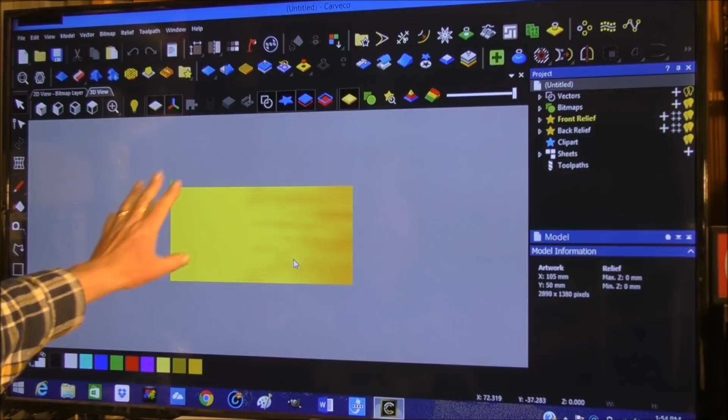I normally leave this resolution slider bar in the middle. It's fine, and obviously we're dealing in millimeters, so we're going to OK that, which will take us into the program screen. This is the 3D screen at the moment, but we want 2D. So I'm going to start with the outside. Okay, now this little aluminium container was purpose made for a job. So we're going to get the square or rectangle. We're going to just do that.

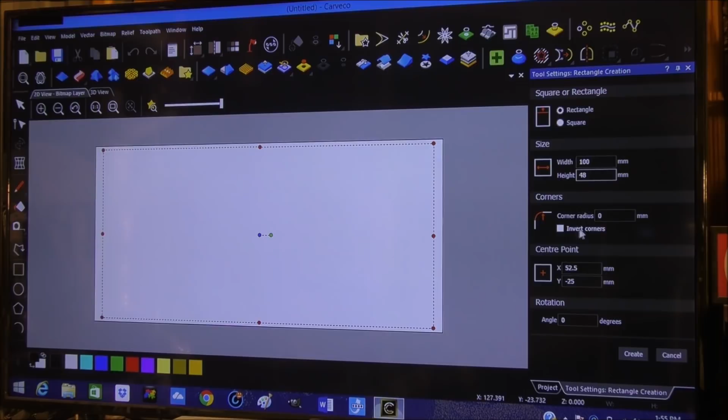Now there's a couple of things we need to do here in this wizard or dialog box. And the first thing is the actual size. Now the actual size of it was 100 millimeters, and it was 48 millimeters. So you can see now that the box, as we're altering here, is jumping to the correct size and position, or close to it. Now I wanted rounded corners, and I wanted a 6 millimeter radius.

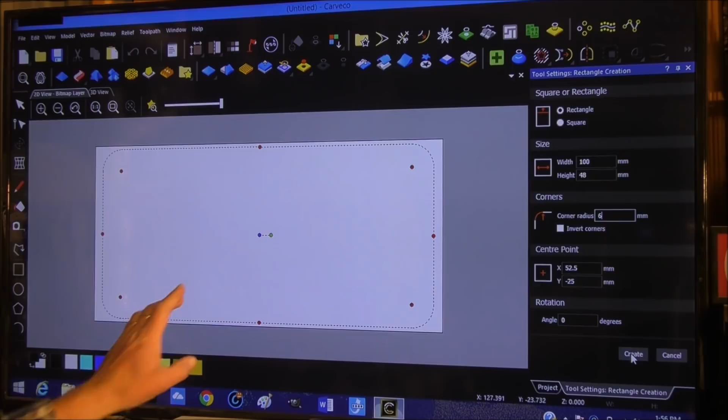So there it is, there's the radius, 6 millimeter. But I want this object to be set right in the center of the stock bar material. Now to do that is fairly easy, and it is actually set right in the middle. So Carveco has determined that yes, I wanted that right in the middle, and it's put it there, and now we can create that. And there it is. So we can get rid of that.

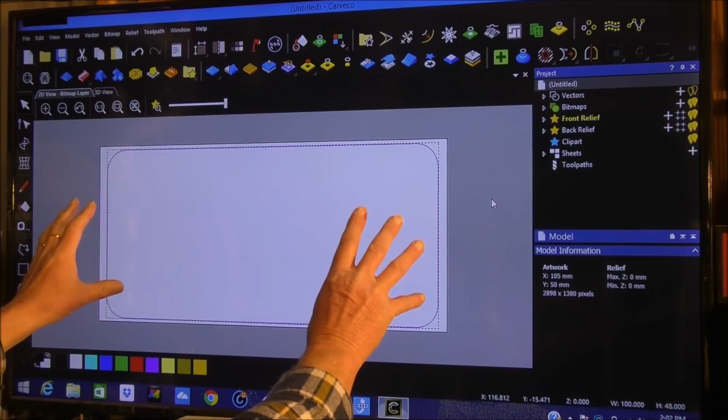Okay, so the next operation we need to do is to copy this vector, and a vector is any line on the screen. Any line, any shape at any angle, it's a vector. So we need to copy this vector inwards 2 millimeters, and there is a tool to do exactly that. That's this one, and it's commonly known as offset vectors. So we'll choose that one.

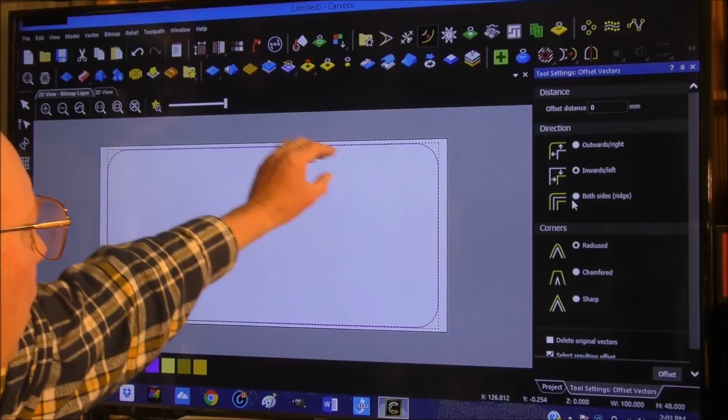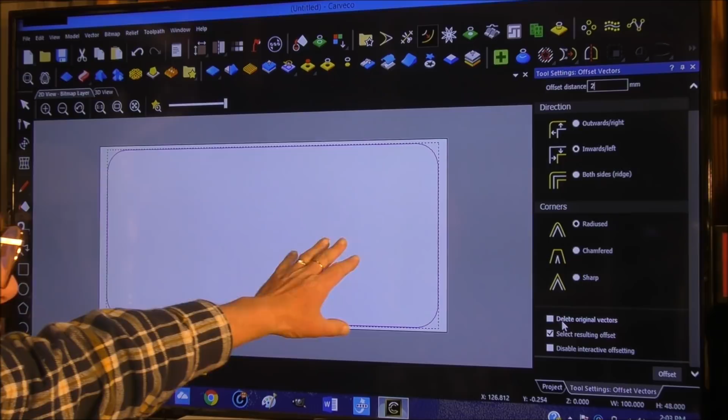We want to copy this inwards, and you can copy either side, outside or inside, a specified amount, and the specified amount is 2 millimeters, because we want a 2 millimeter wall, and radius corners, yes. We have the choice here of deleting the original vector if we wish. Okay, so we can offset, and that's exactly 2 millimeters in, which is just under 1/8 of an inch. So we can get rid of that, and we can click off that.

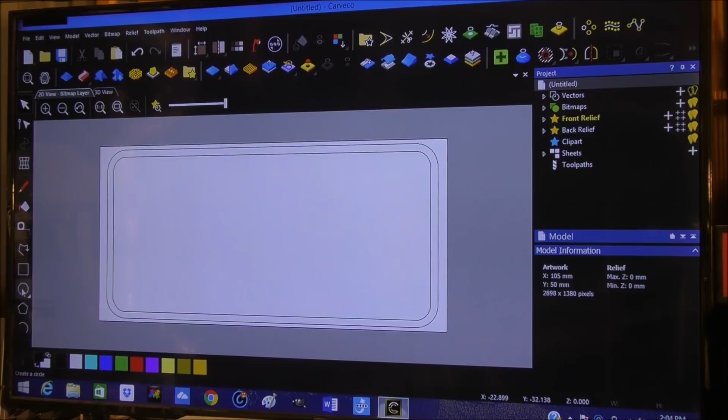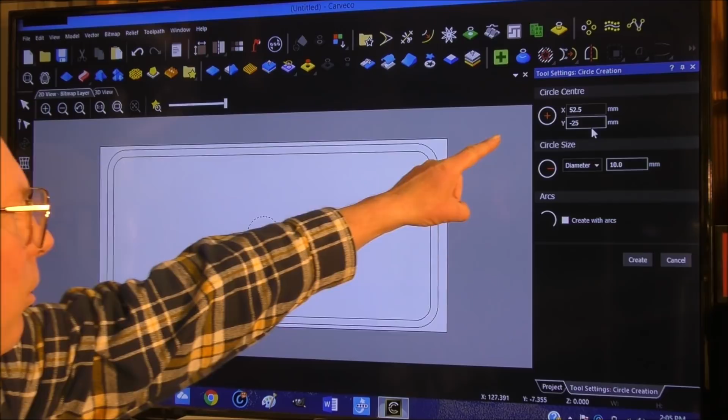Now in the center we want the central boss. If you notice, I have snap turned on, so when we get near the center, the cursor changes, telling me that I'm at the center. I want this to be minus 25, that's correct, 52.5, and it is in the center. Do you remember the bar stock was 105 millimeters long? So that has gone right in the center. It's telling me that it is in the material center. That is exactly where we want it. So we create.

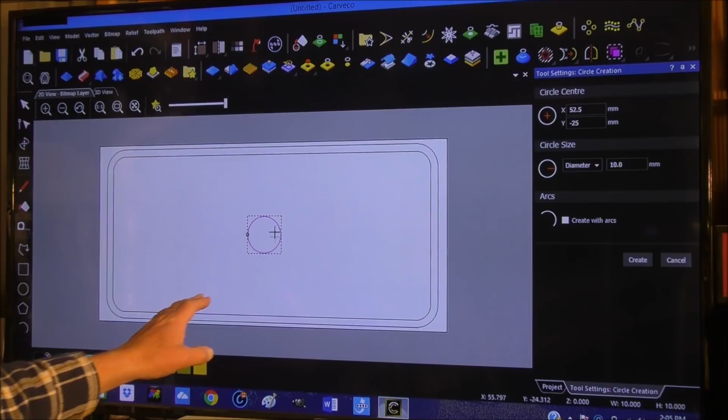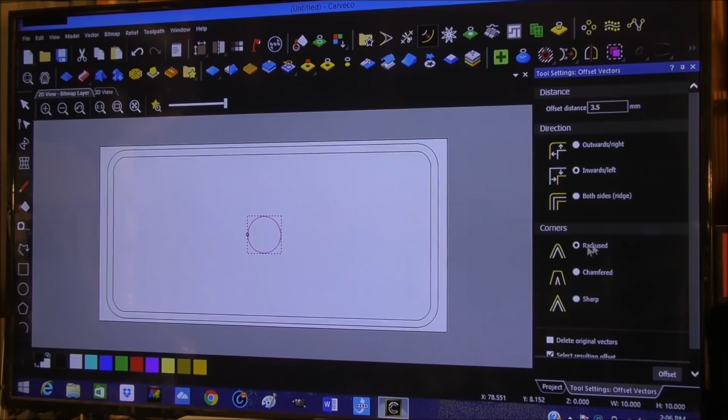And to save ourselves a little bit of time and effort drawing another circle, because we want to drill a hole there, we're going to use this tool again, and we're going to offset inwards. Now we need to offset inwards 3.5 millimeters, 3.5 millimeters inwards, radius. This is all okay, offset. So basically that is our part that we need to machine.

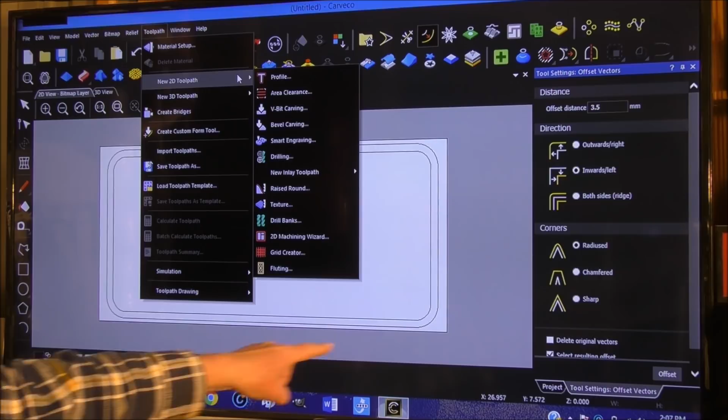So now we will go to the machining operation. This is a straight 2.5D machining operation. So we come up here to tool paths. It's a 2D operation, and the first thing we're going to do is machine the profile around the outside. So we choose profile. So select a vector.

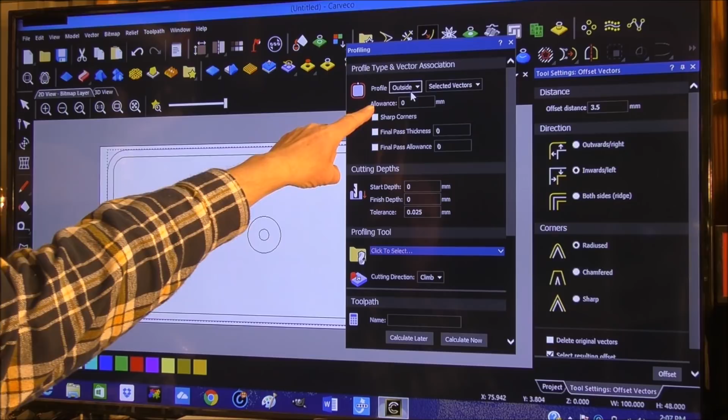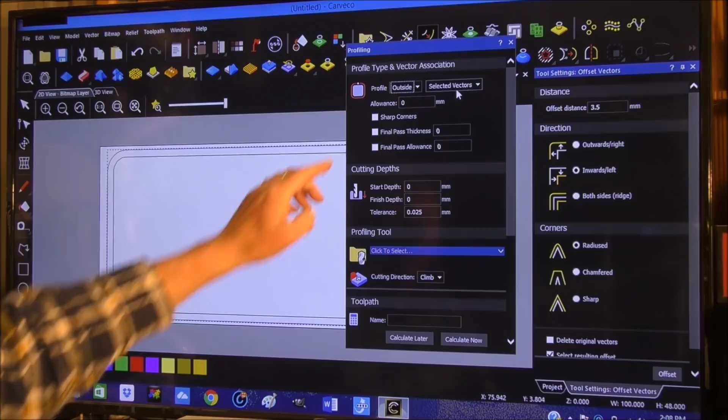Okay, so you're telling the program, and in this case the wizard, this is the part I want you to machine. I want you to machine it on the outside. You can select along if we wish, where the center of the tool will go along it, or inside it, as depicted on the little diagram here. But in our case, we want to profile the outside, and it's the selected vector. We've already selected it, so the program knows exactly what we're talking about. This we can leave alone. It's a radii, so it'll just follow it around.

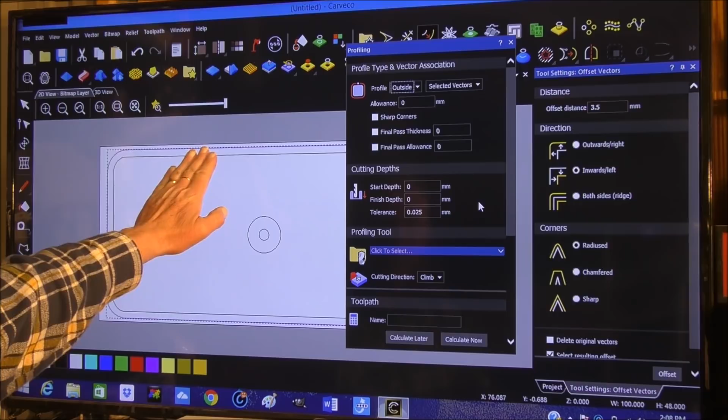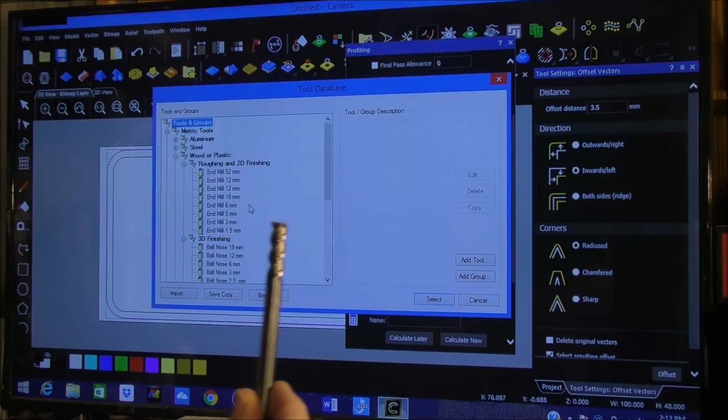Start depth 0. We want to start at the top of the material, and we want to finish 16 millimeters down. Okay, tolerance 0.025 millimeters. That's fine. It's not an absolute precision. The end mill that we're going to use is this one. It's an extended 8 millimeter 3 flute. See the 3 cutting faces there? 3 flute. Beautiful. This is a tungsten end mill, very long lasting.

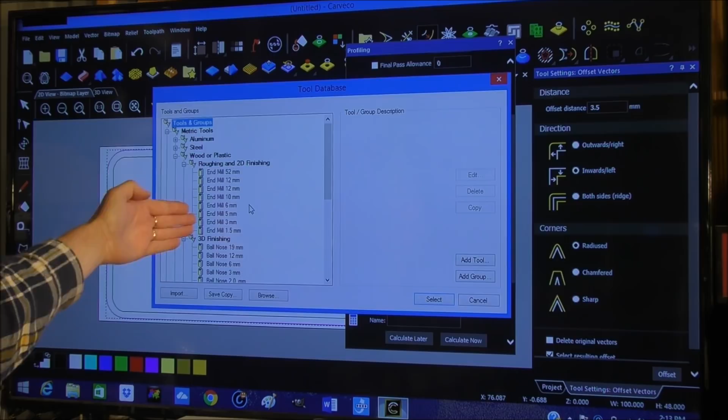And it doesn't exist in our tooling list, so we're going to create a tool in the tooling list. We're going to choose a 6 millimeter, copy it, and choose the one above, which is the copy, and we're going to edit it. This is just representing an end mill. It really doesn't matter about the number. So we're going to put here 8 millimeter. Millimeters per second, that's the feed rate. And diameter 8.

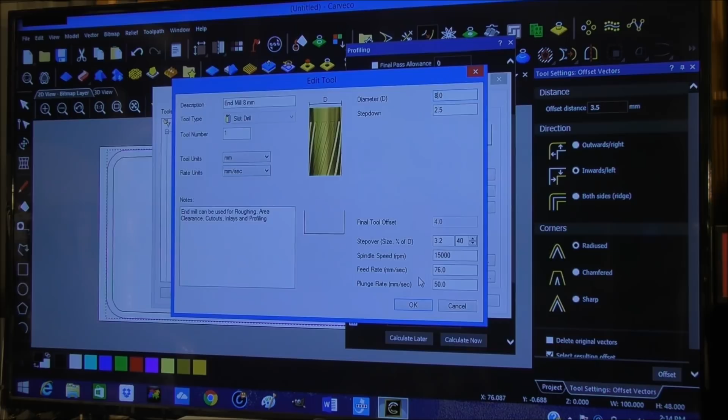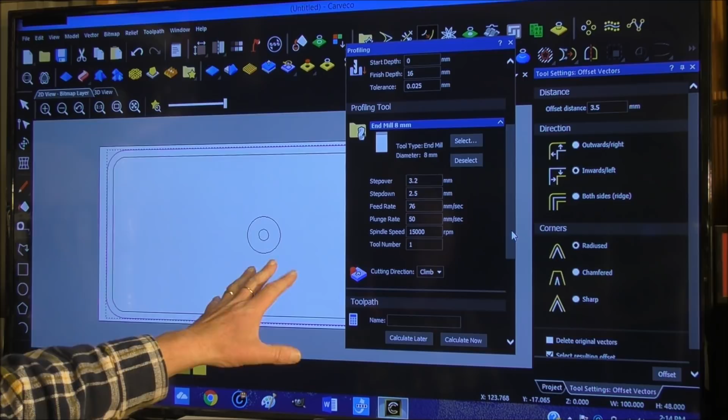This is okay, we can leave that, because all these numbers we can change. Okay, so now we can change the actual speed and feeds. Speed and feeds, here we go. This is where you change or select the speed and feeds for a particular job. Now, you must, in the back of your mind, have an idea: what is the material and what will the tool and the material withstand in cutting.

Step over. Now I've got quite a small, it's a converted SIEG X2 milling machine. It's only a little 350 watt motor, or 375 watt motor. So it's like half horse. So it won't withstand a great deal. I mean, it does the job okay. So we're going to say we want to step over, and the step over is how deep into the material it will go. 3 millimeters, a little bit too much for it, maybe. It possibly could do it.

In actual fact, the maximum step over we require is 2.5 mil. We're going to say 3 millimeters here, because we want to do it in one go, and we're going to ensure that we do it at such a rate that it's capable of handling. 2 millimeters. Now that's step down, so each time it goes round, it's going to step down into the material. 2 millimeters.

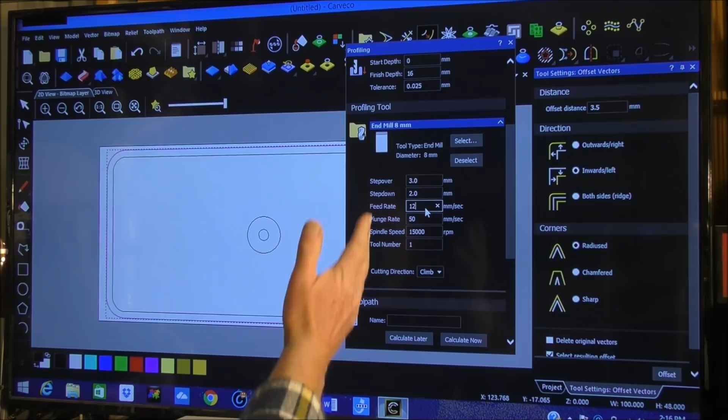76 millimeters per second of feed rate? I don't think so. This is very high. This is set for a commercial CNC router, or even something like a Haas. So we're going to say something in the region of 12 millimeters a second, but bear in mind, whatever I set in here, I can alter it in Mach 3 to 10% of that figure if I wish, which will be very, very quiet. I normally set the plunge rate at half the feed rate, so that's 6.

And don't forget, this is going into aluminium. Now I know that flat out, that little SIEG, and the way I've got it belted, will do 4,000 RPM. I don't have a tool changer, so that's not going to matter to us. Now, climb milling, yes, if you have the option, always climb mill. It just cuts an awful lot better. Add lead in and lead out moves, definitely. Distance and diameter, I'm going to go 10 millimeters.

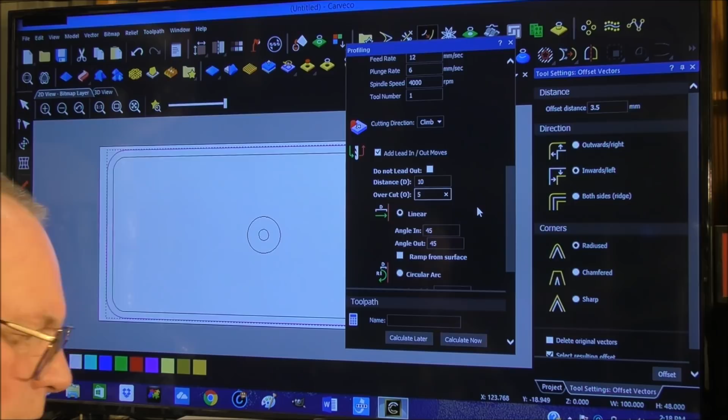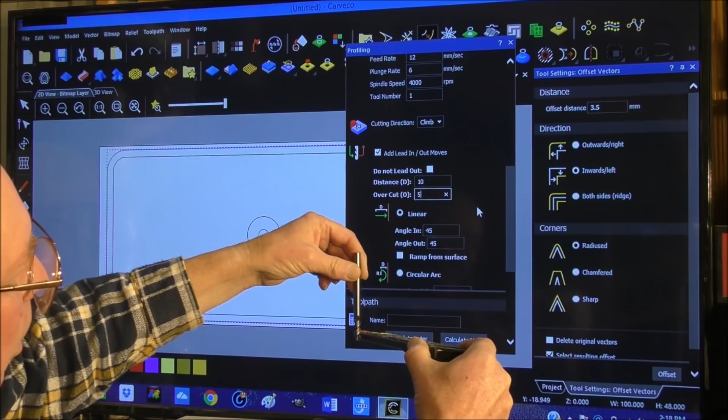Cut. 5 millimeters. So if you've got a piece of material, this will do. What I'm doing with this lead-in move, because I'm going to run around this outside, I want it to come into the side, then start going around, but I want it to come in gently, you see. So that's why I'm setting these figures up. I'm saying, well, come in 10 millimeters, then come in gradually.

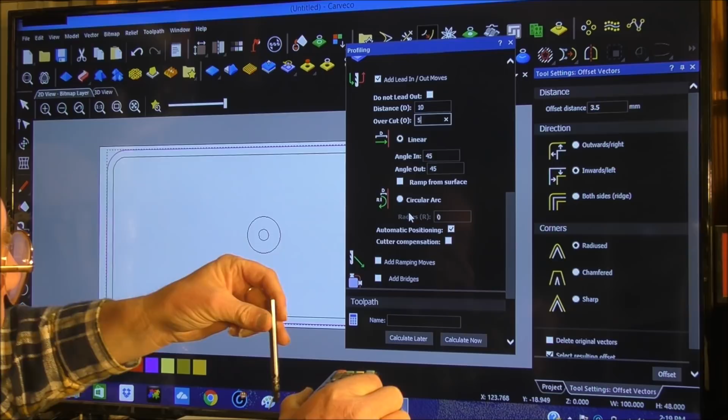Ramp from surface, there's no need to ramp from surface, but this is what I want. I want it to come in at a nice segment, sort of like this, as depicted in here. And yes, radius 5, because I set the distance here 10, so I need a radius 5 to come in. And you see on the video, indeed that's what happens. Ramp moves, I will include ramp moves, zigzag 10.

No, there's no need to. This will sort it, actually, because this will do it right from the very first cut. That'll handle it. No need to do any more there. Cut sequence, no. This is okay. Safe, 20mm safe area above the material, that's fine. Now let's define the material.

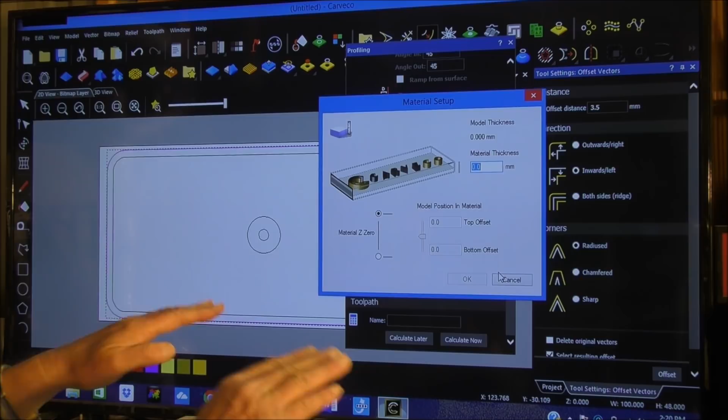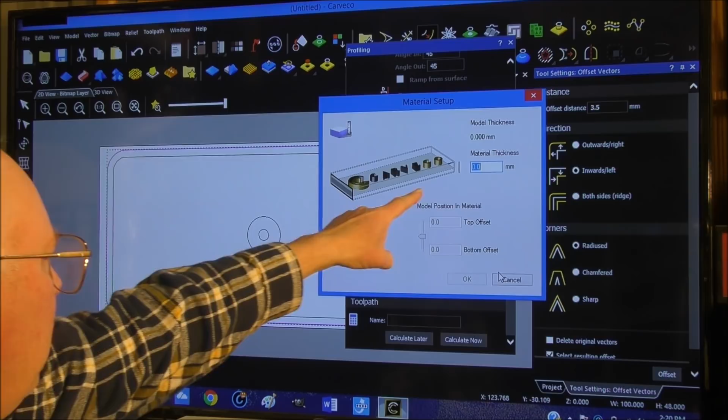Now what you've got to think of is, okay, I have the material clamped in a vise. How much am I going to have sticking out? I know I can safely clamp 3mm, and I know I want to come down 16mm, so that leaves me 2mm clearance between where I'm cutting and the top of the vise. So I'm going to tell this that the material thickness is 18.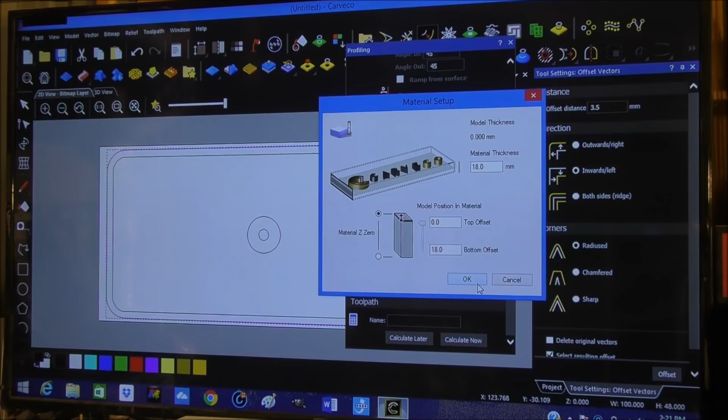And model position is in the top. This is all okay. Yeah, model position top, 0 is in the top. Okay, I'm going to OK that. Okay, so now we label this. Now I abbreviate everything. Cannot calculate for the following reason: lead-in distance must be less than or equal to the radius.

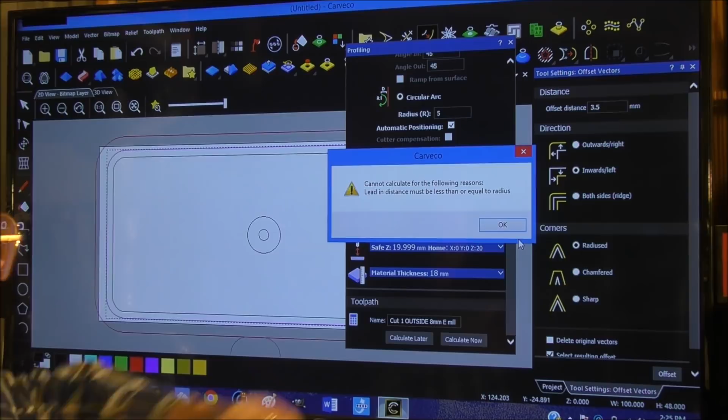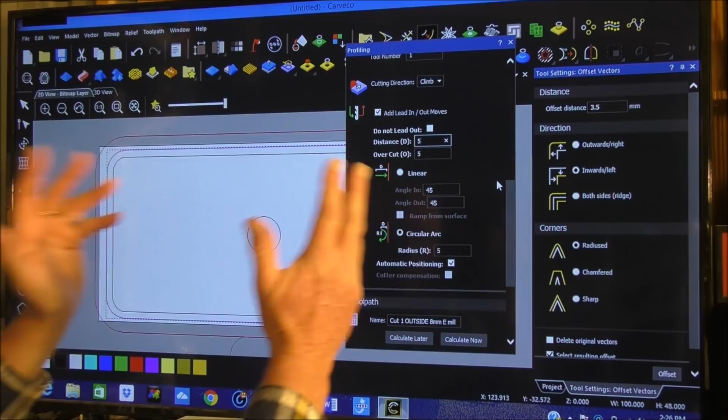See, now I made a mistake here, albeit a deliberate one to show you. The radius here is 5, overcut is 5, distance 10. So actually that is supposed to be 5. Now that's the beauty of this program too. There's that much thought gone into the making of this program, and over the years the modifications to the program, that it won't allow you to make a mistake if possible. So calculate now, and it's done.

So now we can get out of that one, and there is the tool path, with the lead in and lead out moves. It's indicating it's done.

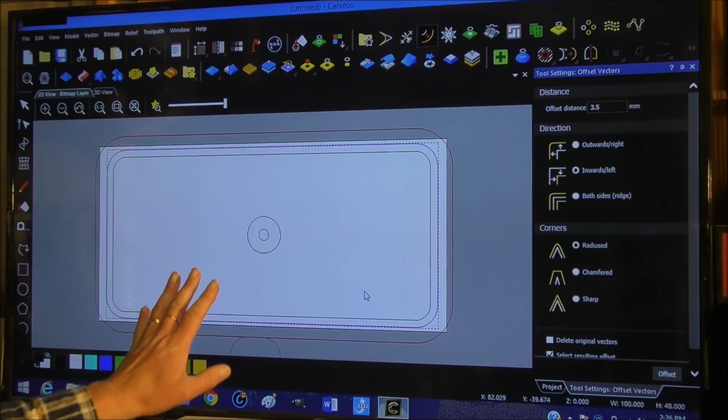So what we're going to do now is an area clearance. We want to machine this area between the inner wall and the outside. So you select that, and notice this vector shows it's selected. Then press shift and select this vector as well.

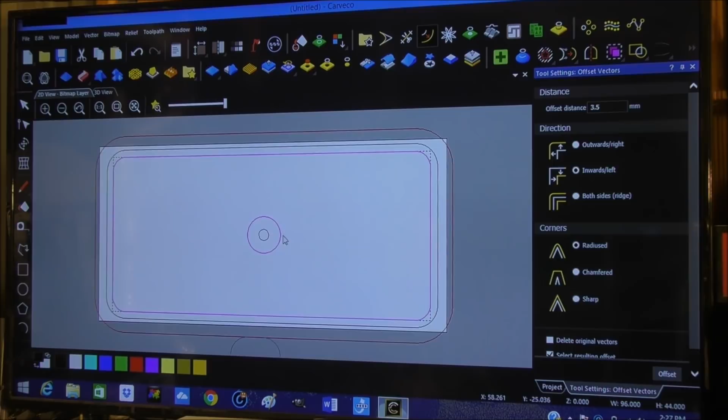So when we select the machining operation, say between the selected vectors. Toolpath, still a two-dimensional operation, it's an area clearance, and selected vectors - that you have a choice. So we've selected the vectors, so it knows you want the inside material machined out.

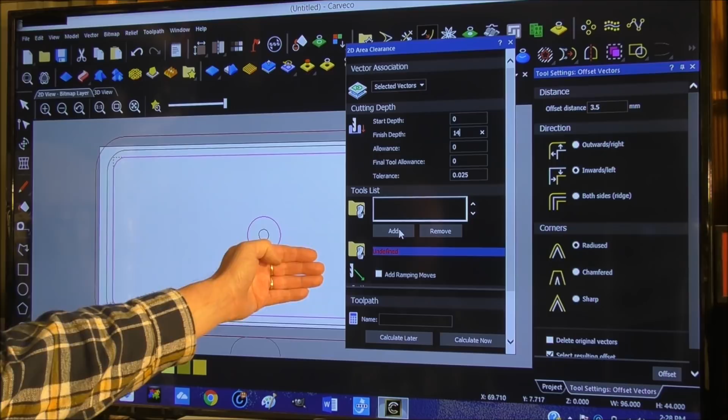Now then, start depth 0, finish depth 14mm. Tool allowance - so now we need to add a tool to machine this. Open, 8mm, there it is. We put it in the tooling list before.

We're going to use the same tool to clear this out. I'll select that. Okay, so we've selected our tool. Now we're going to set the parameters.

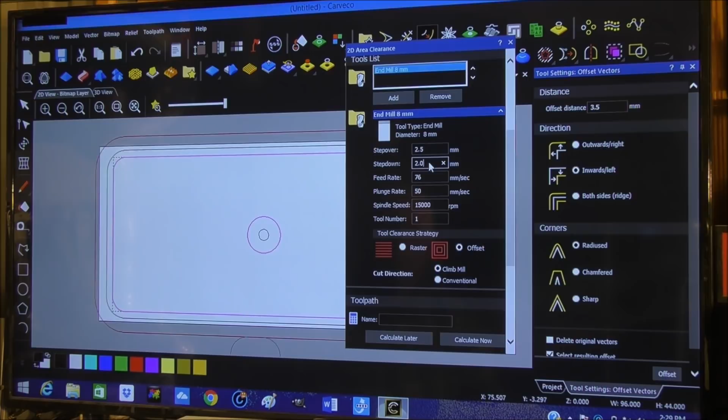Step over - we're going to make this easy life on the tool. We're going to say 2.5 millimeters. Step down of 2. And there again, 12. Not forgetting we can alter this in Mach3, it's not set in concrete. 6.

4,000. Doesn't matter to us about the... and this is set right for us. We want to do an offset, in other words, we want to come in with the tool.

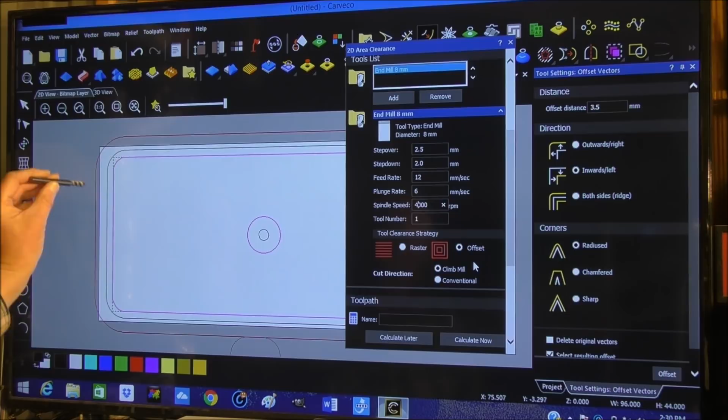It will start in the middle here and machine from the center and work its way out, and then go like that - not come in and go back and forth. That's not the way to do it. In this sort of circumstance, you need an offset. Climb milling, always use climb milling.

Inside start point, start in the middle of the material. Independent finish depth - now let's see if I wanted to do a finish cut. I don't want to do a finish cut. Add ramp moves, definitely. 10 degrees, that's okay. Minimum ramp length, I'm going to 10 millimeters. Zigzag height, 5 millimeters.

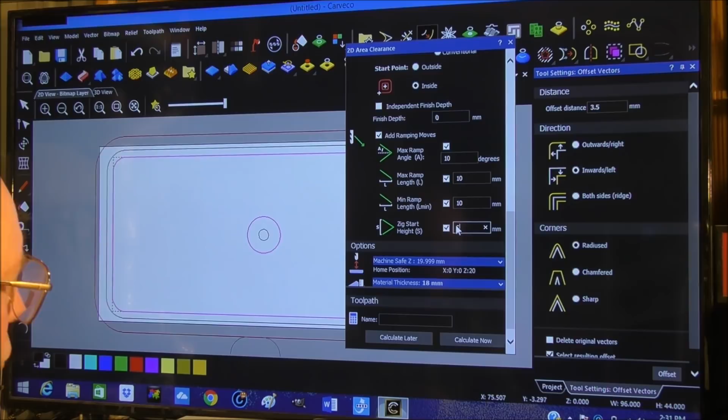So that means it's going to come into the material. It's going to go zig, zag, zig, zag, zig, and go into the material gently, not come in and hit it hard.

This is all set up, this is fine. So this is the second cut. I abbreviate everything, as I've said - cut 2, 8 millimeter, E mill.

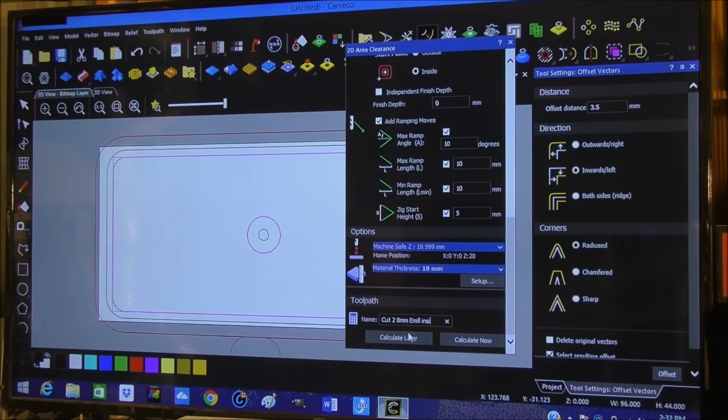Let's say where it is - so this is the inside. Okay, calculate, and there it is. And we can get rid of that one. So we've done the outside, we've done the inside.

Oh, facing operation - actual fact, I forgot about that. So what we need to do is face off the top first, actually. So we can do that now. It's no great drama. Now, for me to machine the top off this, I have to draw an additional vector.

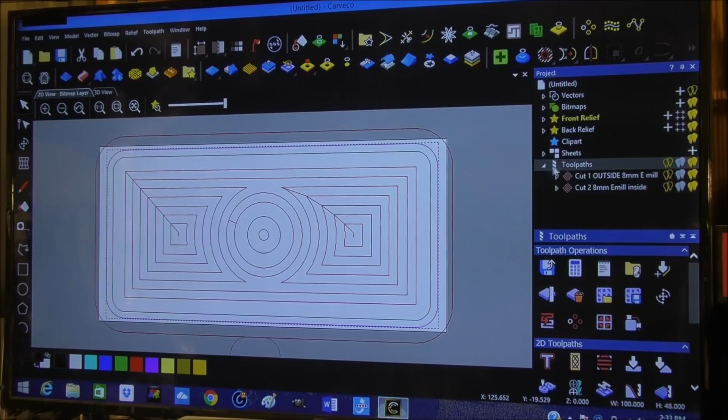Now I'm just going to get rid of some of these lines, let's turn these off. There we go. So what I need to do, so I can face off the whole material, is draw a box. I'm going to use a big 19 millimeter tool. I'm just going to draw a box around the outside there. It doesn't have to be an exact size, as long as it sort of overlaps, so I know I'm going to machine the whole and not miss any.

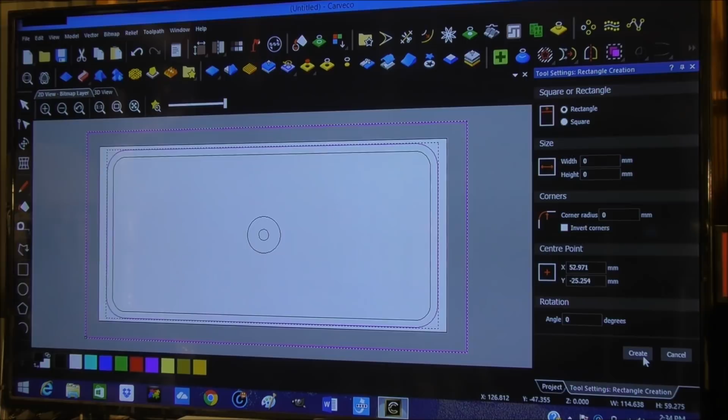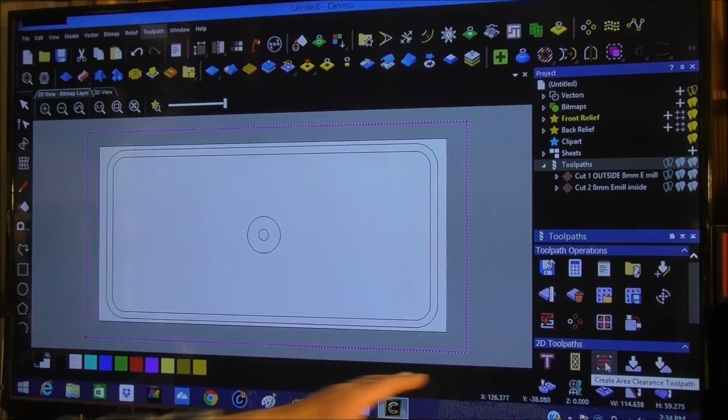So we can get out of that. Okay, I've actually pulled up this now. You can get to the tool paths up here, okay, but you can actually get to them here as well. So select the vector you want to deal with. Area clearance in 2D. So selected vectors, which is that one.

Start depth 0, finish depth - I want to take off 1 millimeter. One millimeter. Tolerance. Okay.

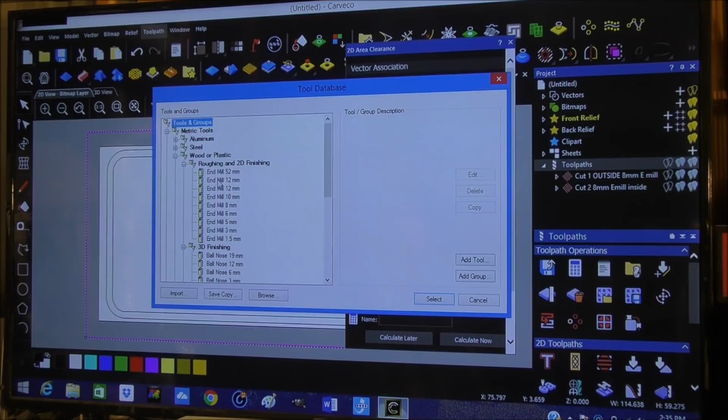I'm going to have to make another tool because it's not in my tooling list. So copy, pick the top one, because it's going to be a larger size. Edit. 19 mil.

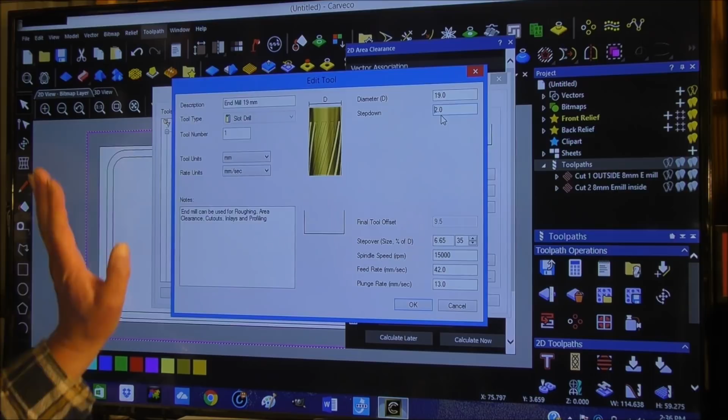Step down - I'm just going to say 2mm. I can alter this on each job. 15,000 - I'm going to leave this as it is because I can alter it on the job. Select.

So here it is, let's have a look. Step over. That's 1mm depth. That's probably okay, I'm going to run with that. Step down - I want to do this in one cut, 1mm.

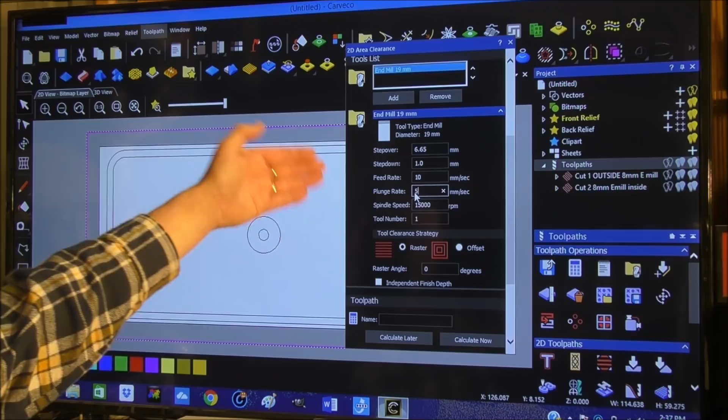Feed rate - I'm going to go 10mm a second. Plunge rate, 5mm, so I go 50% of whatever the feed rate is. I find that works. In this case it's going to be 2000 RPM.

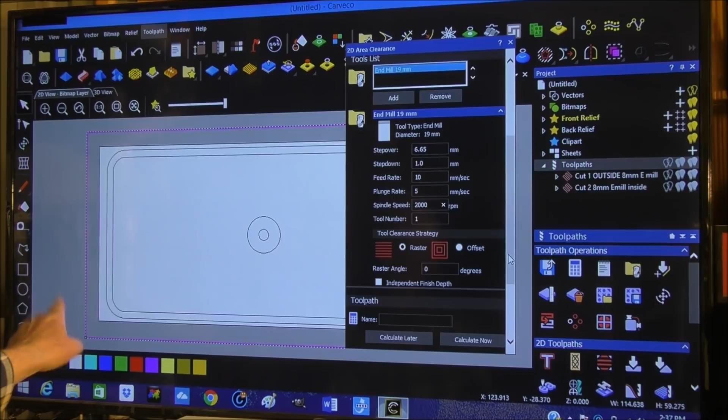Tool number really doesn't matter. In this case I want to do a raster, so that means I'm going to come in here and go back and forth and work my way across the material. 6.5mm each step in.

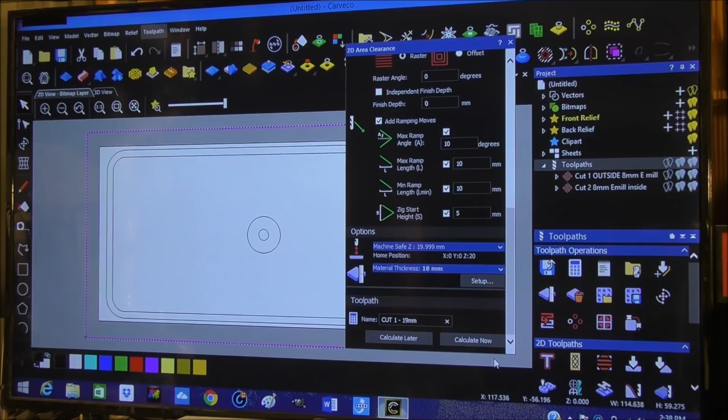Ramp moves, I always use ramp moves. This is okay, this again is okay. I know exactly what that is, so I can leave it at that. And then it is done, and I know I'm going to get all the material in - there's not going to be any left there.

So I can turn these on now. There we go, visibility of all tool paths. So okay, we've got one left now, and that's a drilling strategy, and that's this one in the middle. And okay, so we come up here.

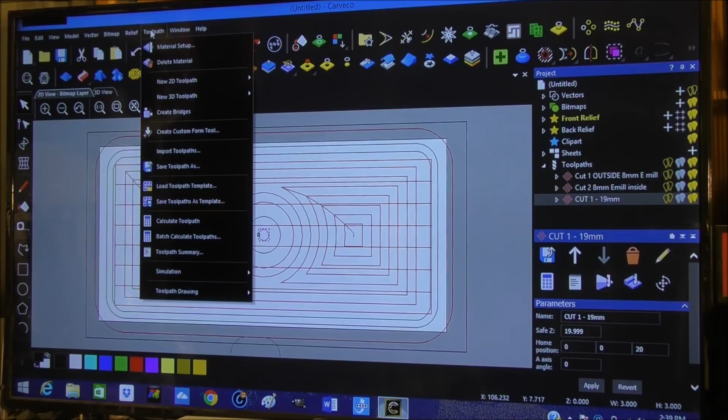To the drilling. Start depth 0, finish depth - no, I only want to go in 10mm, just a little bit of a thread out in there, 10mm. Plunge clearance 2mm, that's okay. Select the tool - I'm going to do this with a 3mm end mill. Select.

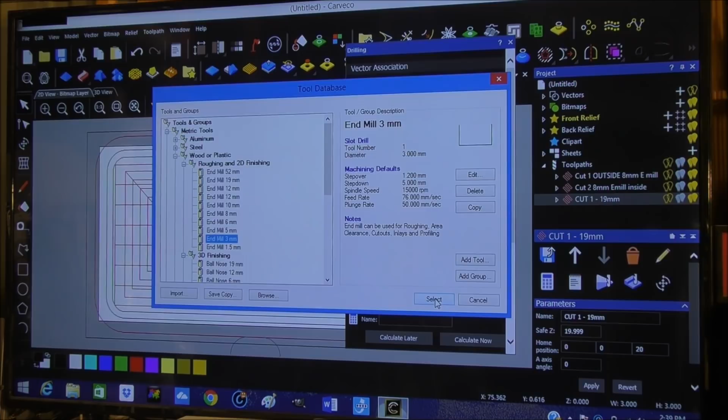Select vectors, that's correct. Use peck drilling, absolutely. Now what peck drilling is, it's like a bird pecking corn - it's going to come in, drill a millimeter, come out, another millimeter, come out, and so on until it all gets all the way down. It means it brings out the material and gives the fluid, the coolant, a chance to flush out whatever's left in the hole.

So that's what we're going to do now. Retraction, I need to retract 5mm. Auto - leave that on automatic. Machine safe Z, home position - this is all okay.

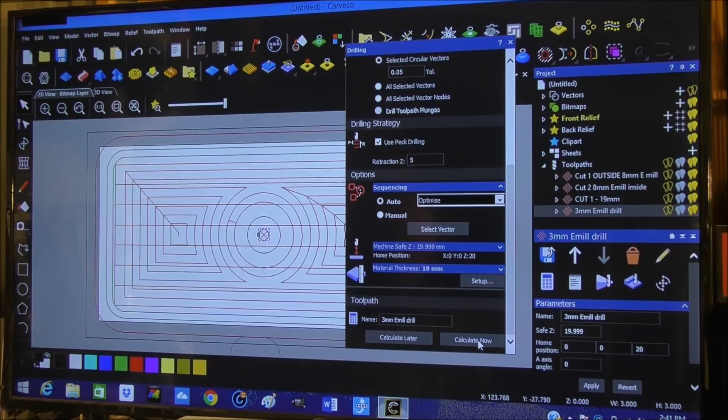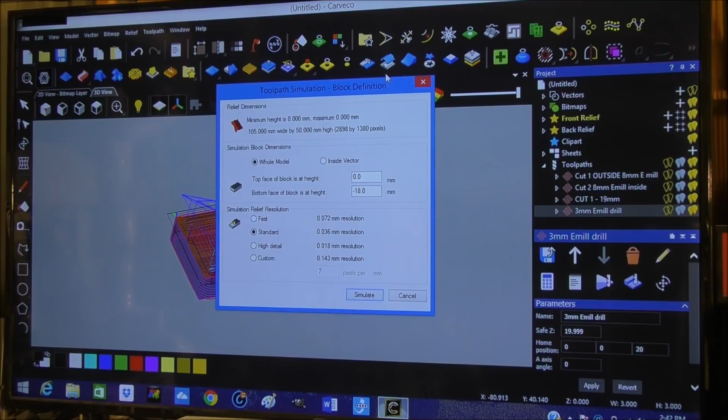So that is our part. So what we'll do now is go to the 3D and we will get our twiddle button or tool. I'll move it up and we'll put this at an angle like this, and we're going to simulate the tool paths - it's only a small job, so we can do it standard.

So here we go. Oh, I didn't say it - see, no, I made a mistake there. So what we're going to do is simulate all tool paths, not just one.

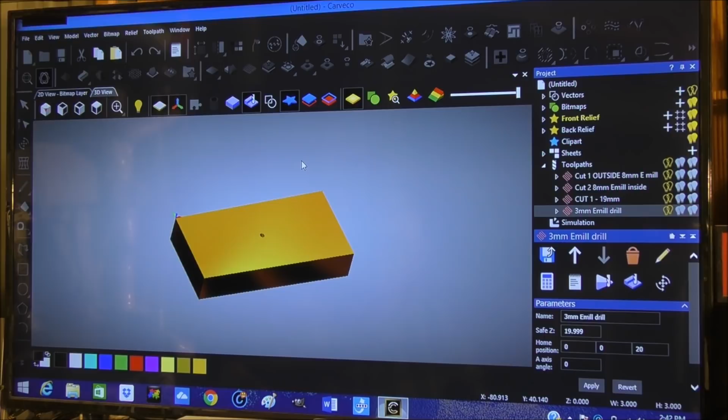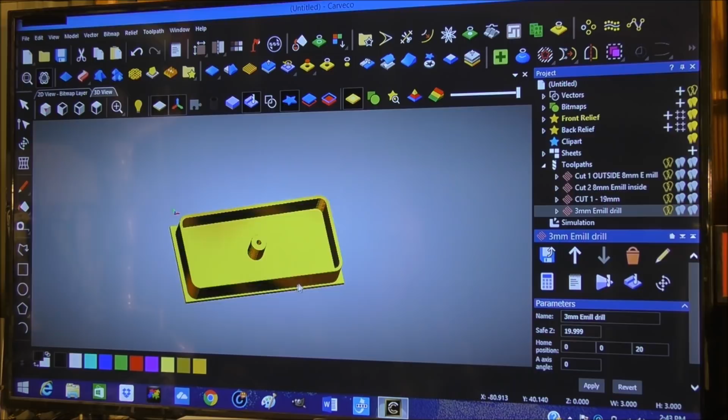There we go, there's the outside. Here comes the inside. I think my computer is busy sort of - there you go. It's updating Windows, I think, in the background, so it's made it a little slow. But that's what we're going to end up with.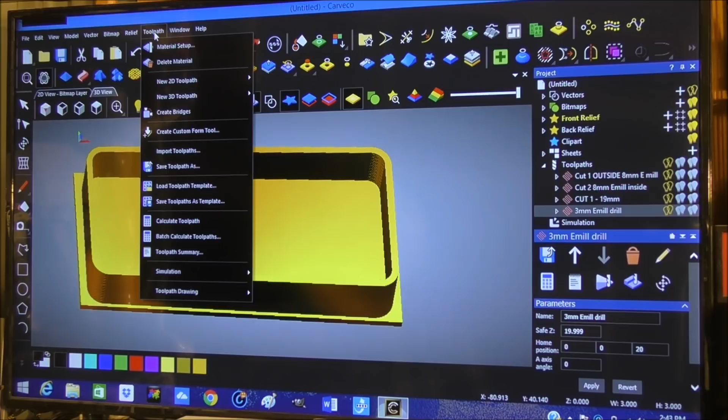So the next thing to do is to save the tool paths. You can either come here and press Save Tool Paths, or you can come up here and get to Save Tool Paths here, so we'll do it here, and there's many different ways of doing it.

It depends on what your machine is. To move them around, you just select them and use the arrows to move them from one side to another. So it's up to you which one you want to start with first, but I would probably start with the facing, which is the 19mm, and save it to wherever you want.

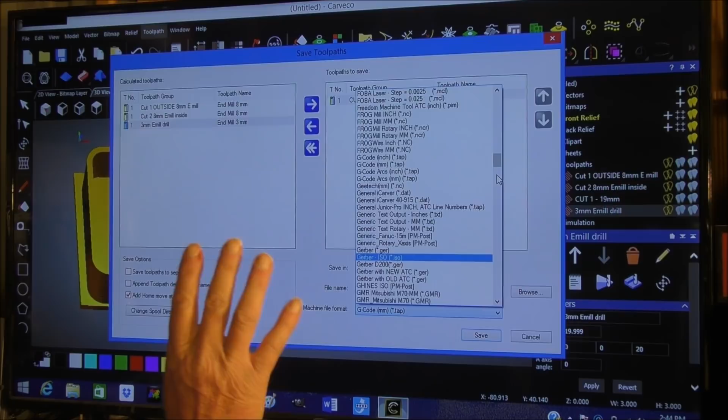One word of caution here: there are many different G-code ways in which Carveco will save. For a Haas or anything like that, it's got certain G-code that is made for it, and this is what they call a post processor. But normal machines like a Tormach or any CNC router, you come here - normal G-code millimeter tap or G-code inches tap. All machines understand that, unless you have a specific machine.

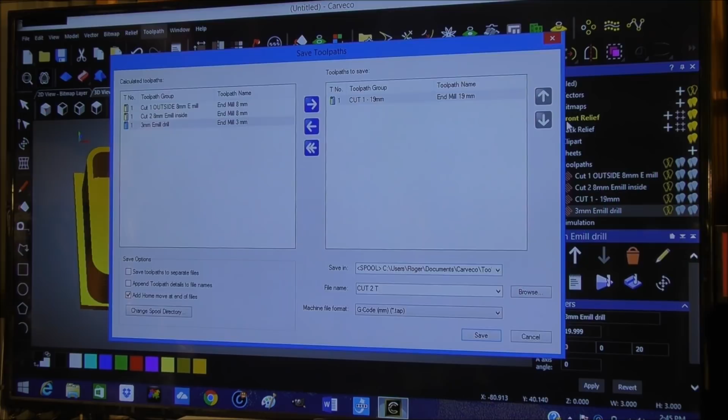So you just save it to wherever you want - a removable drive, or save it into a file on your computer - and that's basically how to do that.

Okay, so I hope you've enjoyed this Carveco tutorial today. This tutorial set out really for the beginner, to set you off on 2D design and simple machining. You really need to get a handle on that first before you start machining 3D parts.